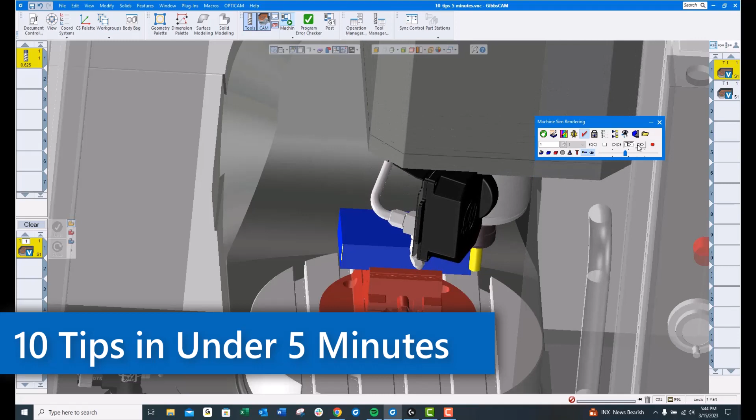Tip number 1: up here under the Help menu, About GibbsCAM, you can find the version of GibbsCAM that you're currently using. Useful information when contacting your reseller for help.

Tip number 2: Icon size. These icons will come in rather small by default. You can right-click next to where it says Mill here and choose Large Icons. This is definitely my preference.

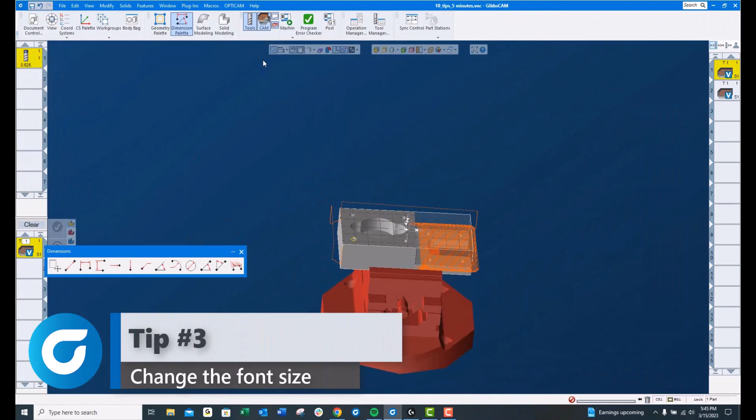Tip number 3: font size. You can see I dimensioned this hole here and the font is rather small. If you right-click on the dimensioning palette, set font, 25 is the setting that I prefer. Much better.

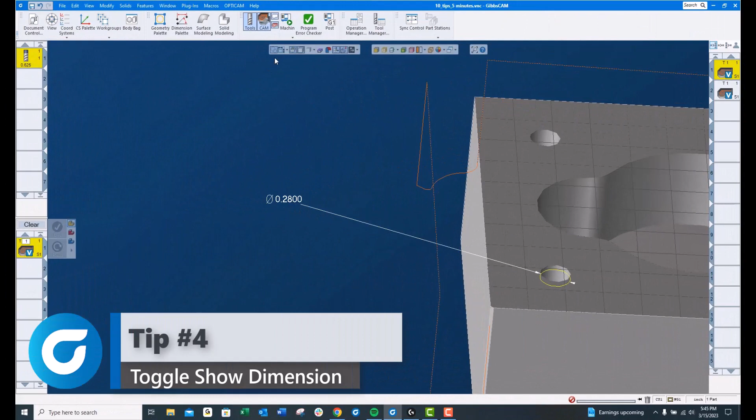Tip number 4: you can close that dimension rather than throwing it away. The second icon from the left on the first floating toolbar will toggle those dimensions on and off.

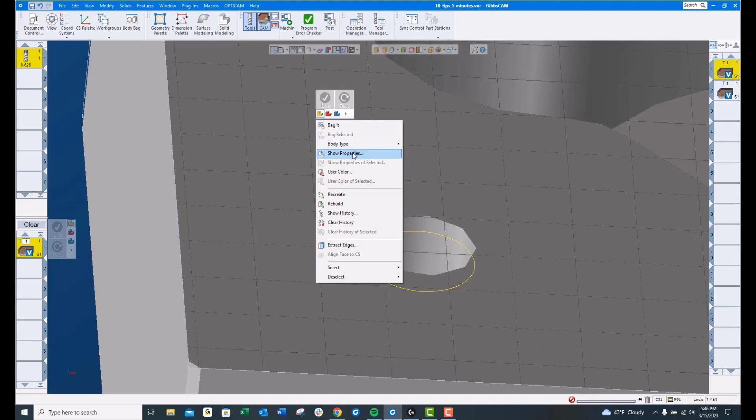Tip number 5: if we zoom in on this hole, you'll see it looks more like a stop sign than it does a hole. If you right click on the model, go to Show Properties, you can set your chord height to 1/1000, which is my go-to number. You must hit apply or it will not take effect. You can now see that that hole looks much more like a round hole than it does a stop sign.

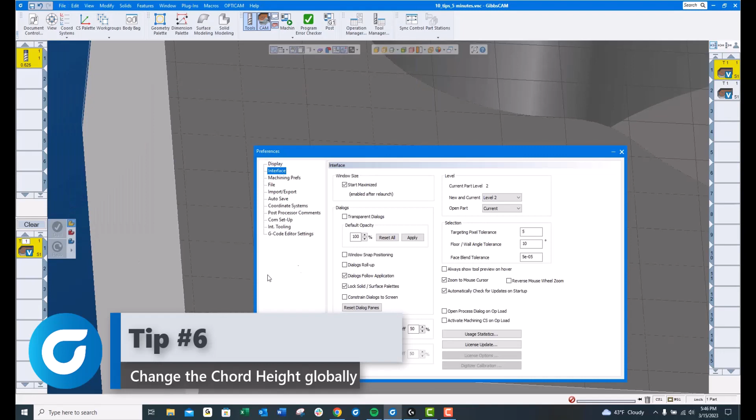Tip number 6: File, Preferences. Under Display, Chord Height. If you change this chord height to 1/1000 and hit apply, now every new model that you pull in will be set to the 1/1000 chord height.

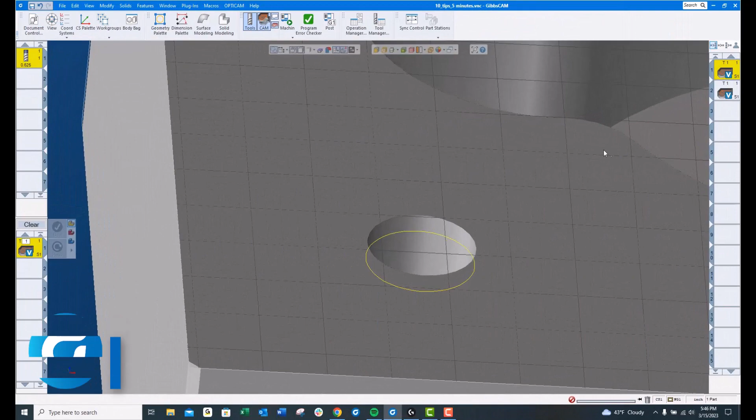Tip number 7: I'll clear the workbench here and show you that when I double click this operation, it loads it over here. If I want to update the speeds and feeds or anything else, I need to double click it so that it pops open. I'm going to clear the workbench.

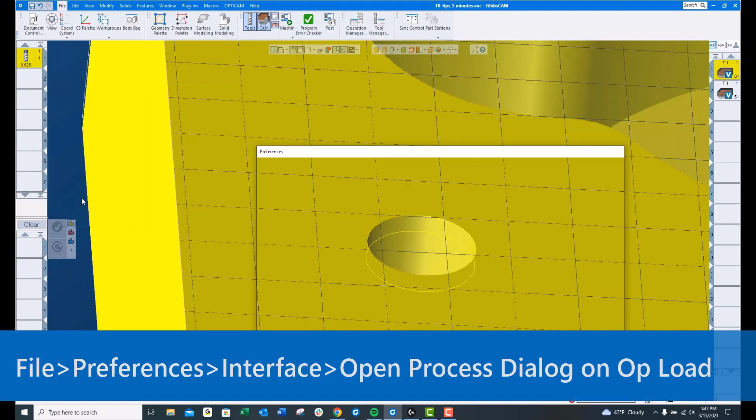If I go up here under File, Preferences, Interface, down here there's a checkbox next to Open Process Dialog on Op Load. If I click that, now when I double click this operation, it loads it over here on the workbench, but it also immediately opens it up for me and saves me one click.

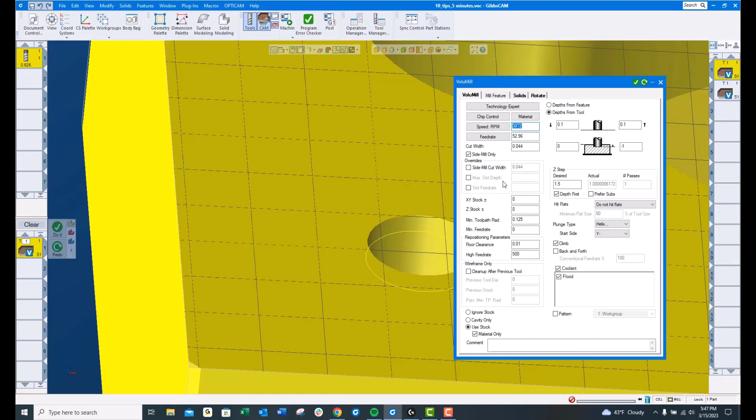Tip number 8: this is your draw axis. Oftentimes people like to customize where that's located.

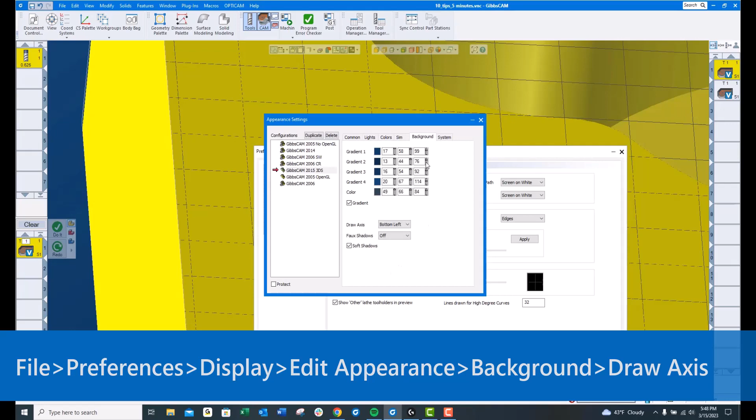Up here under File, Preferences, Display, Edit Appearance Settings, Background, you'll see it says Draw Axis. There's a little drop down here. Let's put it in the top left. You can see that it now moved to the top left.

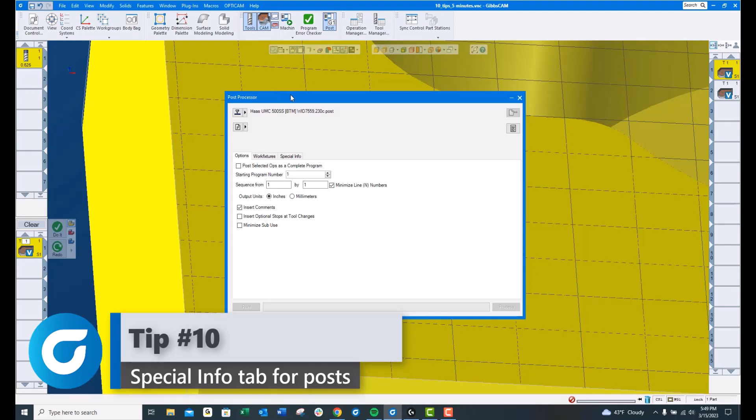Tip number 10: when you go to post code, if you have a more complicated machine, you may have a tab that says Special Info right here. If you click on that, there will be information provided by the post developer and or the post department that will help you program this machine quicker and better.